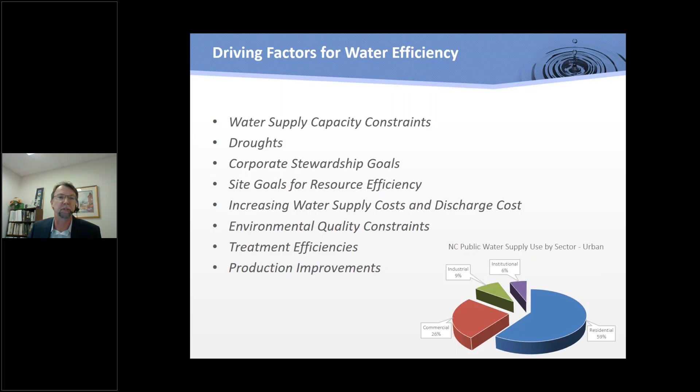One more slide here as background before we get to our speaker. These concepts really will lay the foundation for any successful water efficiency program, and we're going to hear our speakers talk to these in a little bit more detail. First, you have to understand your water and sewer accounting.

Water rates, like electric rates, are complicated. There's fixed rates, inclining, declining blocks. You might have capital fees associated with your meter size, which may be oversized in your case. You might be paying thousands of dollars a month more. And so we have to understand that accounting.

We have to understand our baseline. What is our use? Do we need a sub-meter to understand our uses better within our facility? Can we use benchmarks to compare water use intensity, gallons per unit produced, gallons per gross sales? Look at that internally. It's sometimes challenging to do that in manufacturing, but the external benchmarks can really drive choices in the future for new technologies.

Each site should really craft its own water balance. You should have a pie chart and know where all your water uses are through your cooling towers, through production, through cleaning, through kitchens, through domestic uses. You can do that theoretically, or with sub-metering, but that's a starting point for your green team or your project team to work on your projects.

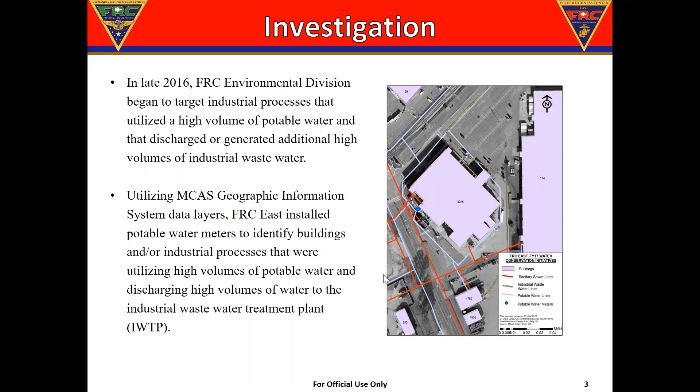We discovered in doing this that we have a large facility, our naval engine airfoil facility. It's about 420,000 square feet, and it has 27 industrial activities to include stripping, deplating, washing, cleaning. And we found out that we were using nearly 79,000 gallons of water per day, and that's potable water.

What we did is we partnered with the Marine Corps. We installed some water meters, and we tried to figure out what was the largest source, where the water was coming from.

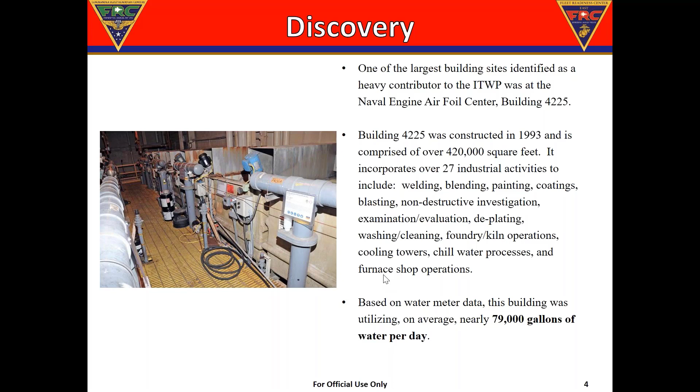When we identified the activities, we worked with the artisans in those areas to figure out what are some of your normal practices? How do you go about your day? What are you using water for?

What we identified was a lot of the water was consistently running in some of our air scrubbing systems, rinse tanks, and then we have the clean line where when we strip aircraft parts, it goes through and gets that second stage, third stage, fourth stage of cleaning prior to being repurposed and put back on aircraft. So this was our largest area of water use in this facility.

So what we did is we partnered with the Marine Corps, we partnered with the Navy, partnered with our Department of Defense, and we updated our clean line into an automated process. It has automated actuated valves, solenoids, and different pumping systems.

Another thing we did is our air scrubbing system in the facility, we made it a closed loop system. So now when the water is running through the system, it's not just going down the drain to the industrial wastewater treatment plant. It's actually a closed loop system, and it's constantly monitored. It reutilizes the water to a point, and then at the point where it can no longer be effective for where it needs to be, that is when we discharge.

And then we went from a continuous overflow rinse process, where the tanks were consistently using water, to an artisan-initiated hose flushing. So we installed these hose systems in this facility to allow the artisans to control the amount of water that they were using when rinsing the parts and the products.

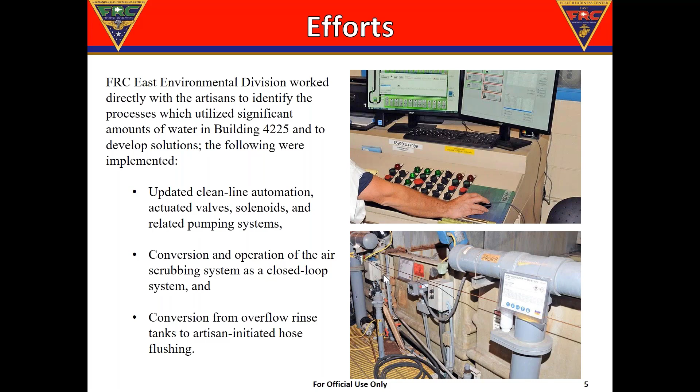At the conclusion of this, a year later, we identified a 56% reduction. We moved from 79,000 gallons of water per day to 34,600 gallons of water a day. And at this point, we're sitting at a 62% decrease in the amount of chemicals required for the treatment at the IWTP. In 2017, FRC East was given a credit back of $540,000 in savings.

To date, we've actually reduced our overall water usage at the plant through these constant monitoring efforts, and we're sitting at a 61% reduction of overall potable water use in our industrial process. It's a continuous effort, and we're continually reducing this. We're trying to get to a point where we're using the least amount of potable water possible.

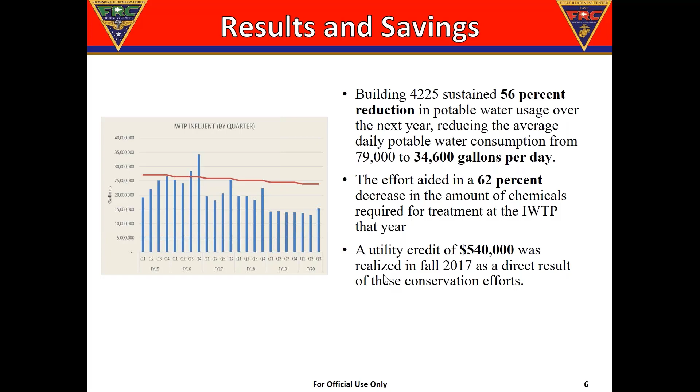We are a large industrial facility. We have a lot of activities. We're very involved with Eastern North Carolina and the state of North Carolina. We've been here for more than 70 years. We've been a steward level member with ESI since 2004, and we are constantly looking at ways to improve our process.

At the Department of Defense facility, it's a challenge every day. Some of our facilities are rather old, but with constant monitoring and upgrade, we're moving forward.

At this time, I have nothing further. I appreciate the opportunity.

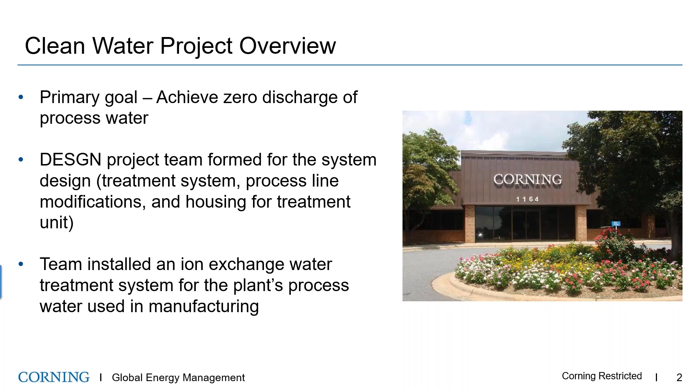The system provided several benefits to both the business and the environment. As I mentioned earlier, the installed system was projected to provide 11% water reduction. But what we realized after the system was installed is that we actually had a net reduction of greater than 20%. So we far exceeded the original theoretical value that we had calculated for the water reduction. That was always good, when you can exceed expectations.

Additionally, the system returned 650 hours back to manufacturing. This was achieved by installing a feed and bleed feature on each process line that essentially allows the water to be turned over every 12 hours. We operate on 12-hour shifts, so in theory that water is refreshed, or returned back to the filtration system, once every 12 hours without any impact to manufacturing. Manufacturing never sees that process going on, it's all automated, so it's all going on behind the scenes and does not impact the manufacturing at all.

Prior to this system being installed, manufacturing would have to shut down once per week and just do a drain and cleaning of the process systems.

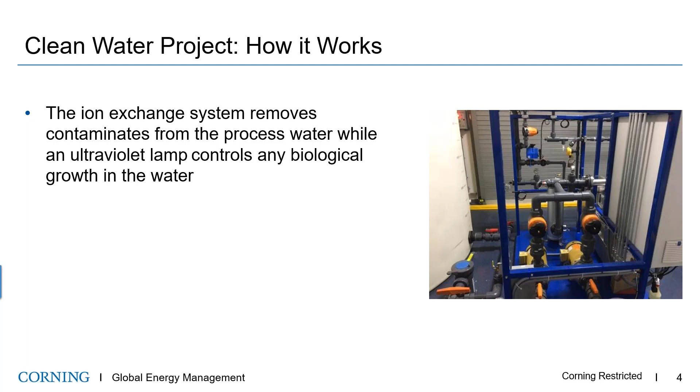And as I mentioned earlier, the system is closed loop, so the only loss of water occurs through evaporation and drag out at the manufacturing process lines. There's really no limit to the number of times the water is filtered and reused in manufacturing. It's a continuous cycle, so water is continuously draining back to the treatment system, filtered, treated, and then returned back to manufacturing on a continuous basis.

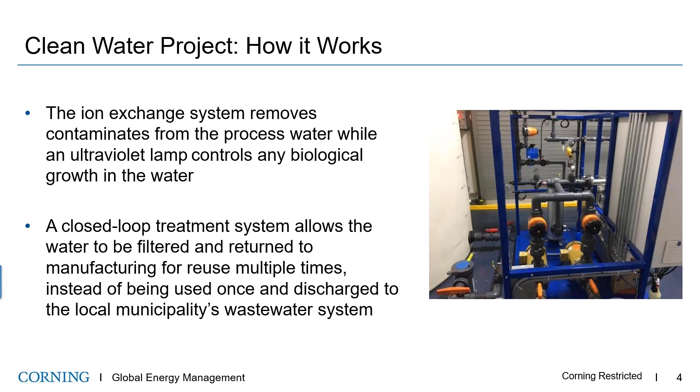So, of course, with any project, there were a few challenges we had to overcome. One was locating a place for the treatment system. In the very beginning, when the project was being discussed and reviewed, and all the analysis was coming together on the cost, one of the first requirements our leadership placed on the team was that we could not have any manufacturing space for this system. So you got to figure out how to do all this, but you can't have any manufacturing space. And we all know manufacturing space is a premium, so it was very understandable.

So the team had to get creative. Fortunately, we had a small utility building, if you will. It was a brick building that once housed an emergency diesel generator, which was removed many years ago, and the building was just being used for storage. So what we did is we basically enclosed that building, insulated it, and that became our water treatment building.

The challenge we had with that building was that it's very limited in space, and so we only had enough room for one storage tank, a 4,000-gallon storage tank, for the processed water. So we had to come up with a way of managing the dirty water coming back from manufacturing, and also the excess or surplus of treated water that manufacturing may not need.

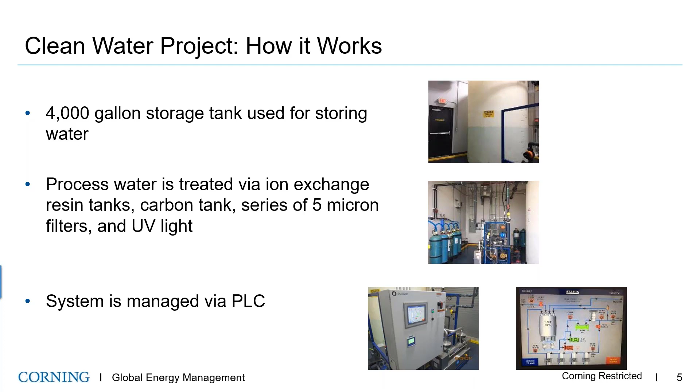In the design phase, we wanted to ensure we looked at energy efficiency. So what we implemented was that all electrical pumps had a variable frequency drive so that we could minimize energy usage.

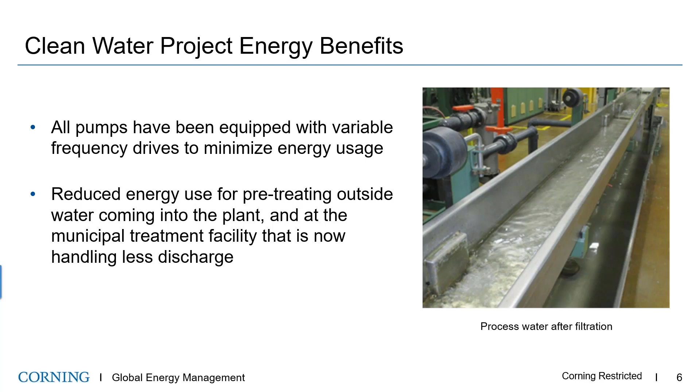That filtration system has also allowed us to eliminate any need to perform pre-treatment of incoming city water to meet the process parameters. That was another advantage of the system.

The project was very successful, such that Corning has installed the next generation at two other manufacturing facilities, and they continue to look at expanding at other locations around the globe.

In summary, the project helps the site reduce its impact on the environment through conserving natural resources, reduced operating costs, and increased manufacturing capacity.

And sort of icing on the cake, something we're proud of as well is that the project was selected as top project of the year by the Energy Star Partners. So another great external recognition that the team and the project received.

So overall, a very successful project for the site and for Corning. And that's all that I have for my presentation.

Well Steve, thank you so much. That was a great overview of this reuse project and how you did it and those constraints. So thank you for sharing that level of detail. Super informative, and I know we're going to have a lot of questions here at the end.

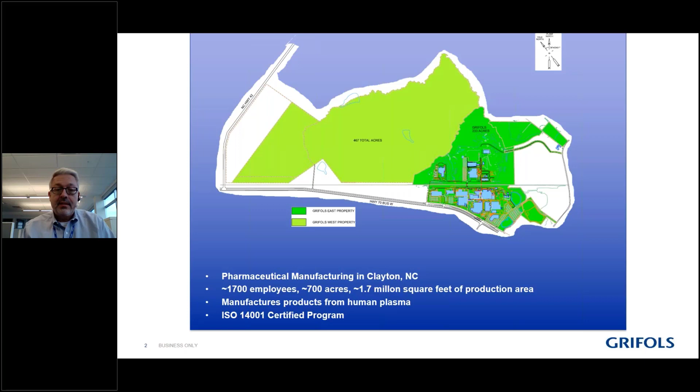Grifols is a pharmaceutical operation located in Clayton, North Carolina. We have about 1,700 employees, approximately 700 acres of space, 1.7 million square feet under roof. What we do is we take human plasma and manufacture it to make a product. The site only occupies a small portion of that 700 acres currently, approximately 200 of those acres, but we have a footprint necessary to expand as we see the opportunity presenting itself.

The site is of course in Clayton, but our corporate headquarters is in Barcelona. So there's a certain Spanish tint to our activities here and what we pursue. The company has been able to link its history back to the Spanish Civil War and the need for plasma on a battlefield situation. Of course, that moved up into World War II, and since that time, moving to the present, we've been able to take plasma and find a multitude of uses for it around the world.

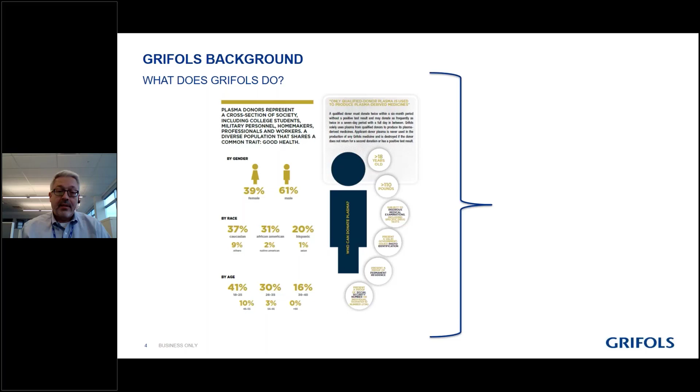What we do is we collect plasma from the general population. Our collection locations are situated outside college campuses. They're located near military bases. And what we do is take plasma from an individual who's healthy and then turn it into a final product. You may be aware that currently we're also able to take plasma from individuals who survived COVID-19.

The antibodies that they have in their plasma can be concentrated and used for those individuals who are struggling with that virus right now. We have an operation here in Clayton doing that currently. Not a lot comes out of us because it takes a number of donors to come up with a useful product, but we are doing that right now.

So that's the background of what Grifols is and what we do. Now the presentation is about the importance of including the one-time water use and sewer use fees when justifying a project. We use a lot of water at this location, especially water for injection. To get there, we take city water, run it through a reverse osmosis system, then distill it to get water for injection for necessary use.

Our RO systems are old, and while effective, they have a tremendous amount of disposed water after processing. In fact, as high as 40% of the water going through many RO units is disposed of. We found a system that, instead of bisulfite injection, uses carbon filtration to properly process the water through this RO system. By doing that in just one of our four RO skids, we could save as much as 9% of the entire city water use from just this one change.

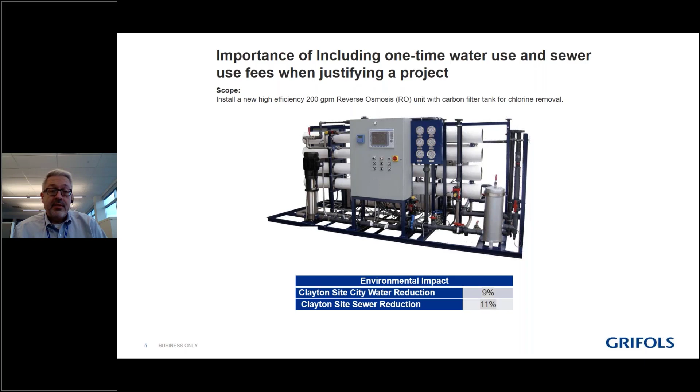And we would decrease the amount of water sent off-site by 11%. It seemed like a no-brainer given the tremendous savings from this new system, a 200 gallon per minute operation. The existing one was 22 years old. Everything was operational, but we needed to replace the system, the controls, the instrumentation, because of its poor reliability, and replace it with this new one.

I mentioned the savings in water use and water purchased. The operational savings would reduce the amount of city water we'd need, as well as sewer. Instead of having 40% of water for disposal, we would find ourselves between 5 to 10%. Maintenance would be better, membrane replacement would go away, and we'd even reduce the number of maintenance employees necessary to maintain it.

The cost was about $1.2 million, and it looked like this was fine, that this ought to go forward with no issue whatsoever. The return on investment, a simple calculation, was 3.6 years.

But unfortunately, we got a hold on this. Management told us, no, of all the projects we currently have in place, water is relatively cheap, don't go forward with this one. From an environmental standpoint this was somewhat of a shock, because it has such a tremendous benefit to the site. So we had to go back and look at other ways to justify this project.

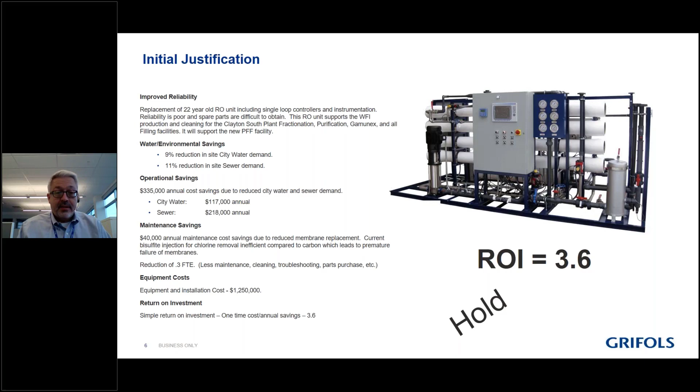That justification had to deal with the municipal user fees. Here in Clayton, if you want to request additional sewer usage, it's a $16 per gallon increase. If you want additional water, it's a $9 per gallon increase as well. These are one-time fees that add up to about $25 per every additional gallon you need.

Now, this site is expanding. This RO system would help us more efficiently use the water we're already purchasing. If we didn't replace it, we'd find ourselves needing that increase in water use, as well as an increase in sewer use. Many people don't realize these two fees will be needed in the future if they just want to continue operating as they do and ask the city for more water and the wastewater treatment plant to handle what they send, and these fees are usually just not included.

I know most engineering departments have an SOP that says a certain percent is acceptable or not acceptable. But when the rubber hits the road in some capital expenditure discussion, that cutoff number seems to move from one side to the other.

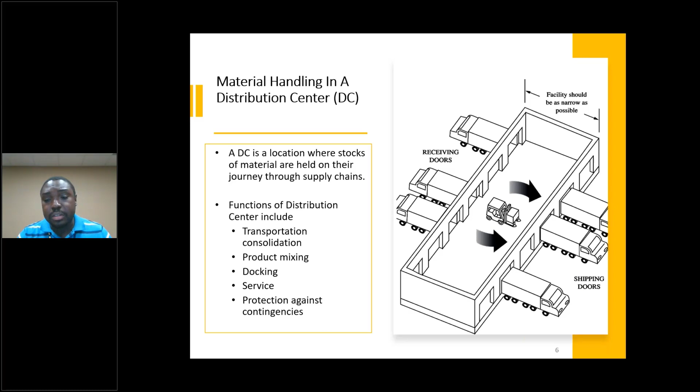Now, if you go through the entire process, the primary activities at a DC include receiving the materials, then doing a put-away where you take the materials and put them in storage locations or picking locations, and sometimes move them from storage locations to picking locations. When we talk about picking locations, this is where people or machines pick the material needed and process them in the quantity required to do the shipping.

We have different types of picking. You can have a situation where you're doing a pick-to-belt, which includes having a conveyor system and picking case-full loads of materials, setting them on these systems, and they go down to a sortation process to where they're supposed to go before processing and shipping.

And you can have a situation where, in our case, we use a lot of cluster picking, which involves picking different materials and creating a mixed carton for our customers. Then finally you have shipping, which is just making sure the product gets out on time to our customers with the right quality and integrity.

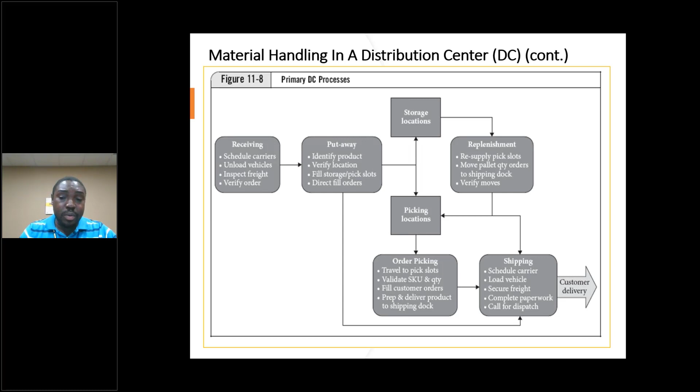So in talking about what happens in general in the DC, material handling becomes one of the critical components of it. It is important that we are able to move materials within short distances, but then move them effectively, because that affects our productivity rate as well.

Some of the things that you would need material handling for would be just moving bulk materials into storage and from storage, moving materials from storage to pick locations, unloading and loading vehicles, and cross-docking, which would be just taking it off one tractor trailer and putting on another for onward movement to a customer. The aim is, of course, to move the material as quickly and as safely as possible within your DC in a very short distance and do so effectively. And it is this effectiveness that opportunity charging comes in, and we'll talk about that in a minute.

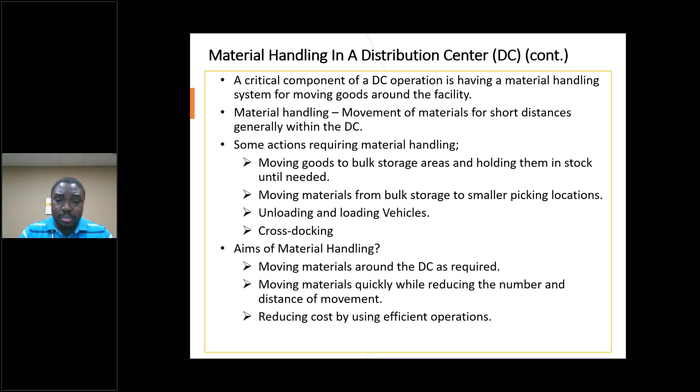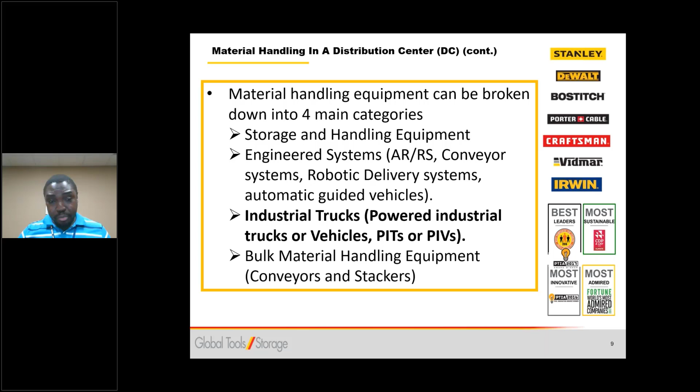With the different types of equipment that you have for material handling, we are going to focus on just the industrial trucks, the powered industrial trucks or vehicles. But we have different types of material handling equipment, and you can break them up into four main categories, including the automated storage and retrieval systems, which is more of the robotics and all. The bulk material handling will be a lot of conveyor systems, and we use conveyors here a lot through the facility. And then you have storage and handling equipment as well.

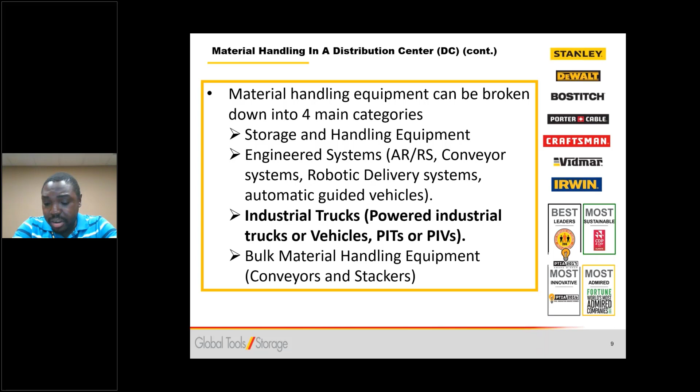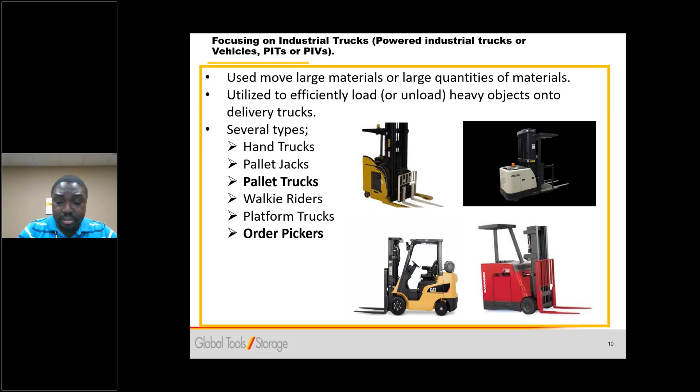So our focus, though, for this presentation is really on the industrial trucks. Some people refer to it as powered industrial vehicles, and some refer to it as powered industrial trucks. These are the forklifts, the pallet jacks, the walkie riders, the order pickers, and what have you. These remain integral in a lot of DCs, especially for DCs like ours, which does not have a lot of automation. Our conversation would be based on the pallet trucks and the order pickers, which are electric vehicles that we use in the facility.

Now, the opportunity with using the electric forklifts is the fact that if you have an indoor warehouse, of course, you want to minimize your emissions from any type of vehicles or any type of process that you use to ensure good indoor air quality. And so that's why electric forklifts are the preferred forklifts to use in an indoor environment.

Furthermore, they run more quietly than the internal combustion forklifts, which means that if you have processes that do not give off a lot of sound, then you do not have to worry about the hearing conservation program and adhering to that. Now, these electric forklifts are powered by large lead acid batteries. Some of them come way up to 5,000 pounds and more, and these must be charged routinely. And that would require you to make sure that you have a designated area for charging and for changing your batteries if that becomes necessary.

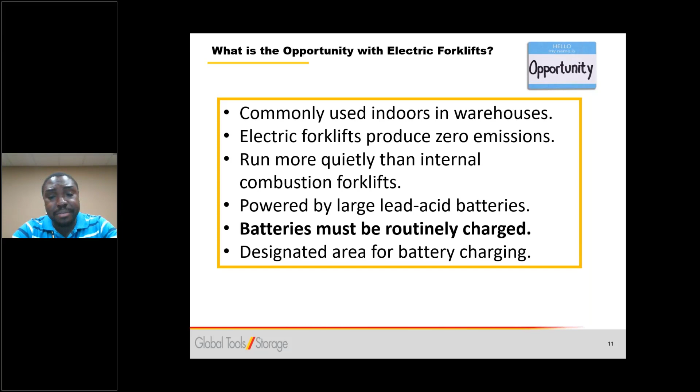So, what is the problem? What's the situation that we are dealing with? Now, conventionally, you have a situation where electric PIVs are usually operated for one shift and then charged overnight. And then you have a situation where after charging, you have to also let them sit for about 8 hours to cool before you use them.

And so the conventional charging becomes ideal for when you have a single shift operation. And the way that works would be for you to buy extra batteries so that every forklift would have an additional battery or two, so that whilst one is cooling, the other is in there operating.

And what happens is you have a situation where employees are changing batteries between shifts and all that, and you have different possibilities of forklift batteries that weigh 5,000 pounds falling down based on the number of times you are changing them, possibilities for environmental spills, possibilities for high repair costs because now you have a lot more batteries, you are paying a lot more to maintain them. And sometimes if you want to have the best in the system or in the business, you need to have very good battery changing equipment installed, and that can also be expensive.

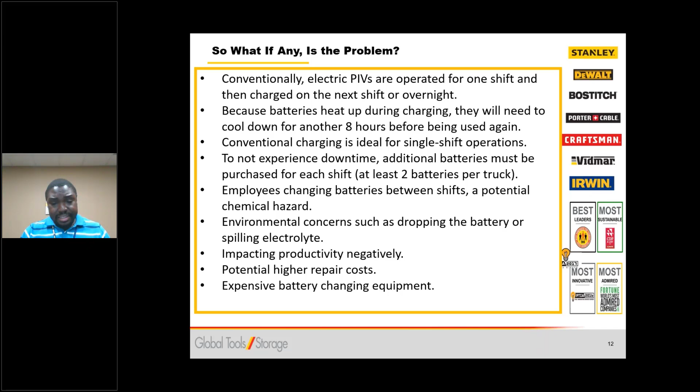So how does opportunity charging come in here? Opportunity charging is just as it sounds. There is no one best fit solution for all warehouses and for all businesses when it comes to how you are using your material handling equipment.

Now, we have a situation where if you are running multiple shifts, like we do with this particular DC - four different shifts, first, second, and third shift, and the weekend shift as well, operating almost 24/7 - we do not have the luxury of waiting 8 hours to charge a battery and then buying multiple batteries to be able to run the over 100 PIVs that we have, and be able to do well when it comes to productivity and when it comes to our desire to be great environmental stewards and to ensure safety as well.

So we opted to go with opportunity charging, which involves being able to charge your battery throughout the shift at any time you get. So if you have associates going out on break for 10-15 minutes, these opportunity chargers allow them to put their forklifts down, plug it in, go to break, come back, and then start using them. When that happens, you get a longer use out of the battery for the period and don't have to wait till the end of the shift, run the battery down completely to 0%, and then charge it all the way back up to 100%.

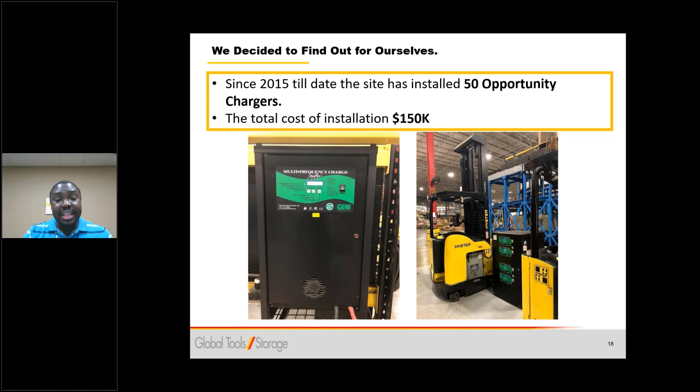So since 2015 to date, we have installed about 50 opportunity chargers at a total cost of $150,000. This has been installed throughout different parts of the DC so that based on where you find yourself, which department, you're able to use the opportunity charger available for you at your department.

So what has been the benefit we've seen? Since 2015 till date, we've actually increased the value of products coming in by about $5 billion. We've increased our pallet locations, increased the number of products coming in, and increased the number of products we're shipping out. So this is just to say that we are doing more. The good thing is now we're doing more with less, because the number of electric PIVs have reduced from 114 to 84 today.

Based on increased productivity and the opportunity charging that we have put in place, we've been able to eliminate some of the PIVs in our system. The lower number of PIVs we have, the better it is for safety and for maintenance cost. And if we can reduce our PIVs while still increasing our productivity, increasing shipping and output from the DC, which is what we are measured on, then it's a win-win situation on both the EHS side and the operation side.

Based on that, we had a lot of lead acid batteries in our system to sustain the number of PIVs running multiple shifts, which would require us to switch out batteries. Now that we aren't, we've been able to cut down our lead acid batteries from 265 to 149, a 44% decrease. We're still looking to cut more down, because sincerely we can - we don't need an extra one for every single PIV. So we are still looking forward to cutting more of those batteries down. But in the past 5 years, this is what opportunity charging has done for us.

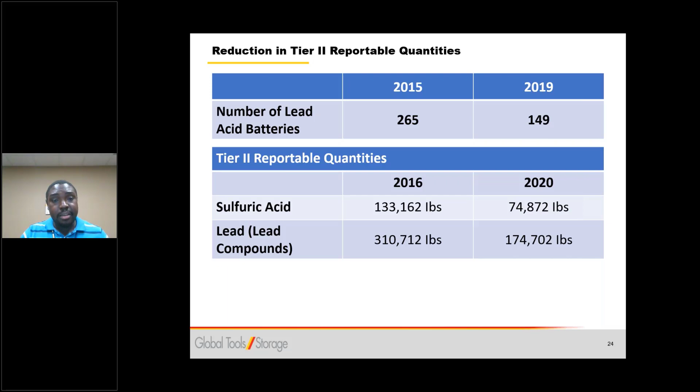And what we have done is being able to reduce the lead acid batteries from 265 to 149 has allowed us to store less reportable quantities on the site, which means we have to report less to the state, which means that if ever there were any emergencies involving these lead acid batteries, we would have less hazardous chemicals to deal with. So that's also a good thing from the project we've implemented.

And so there you have it. What we have seen is lower electricity consumption, less spills reported in the past 5 years, lower cost of maintenance and servicing of batteries and forklifts, and increased productivity and efficiency based on that, and our ability to invest in other continuous improvement projects.

So all the money that has been saved has been put into other projects that we've done, including being able to go to zero waste to landfill. We've been able to do that because now we've been able to save from our processes and reinvest in other areas that benefit the environment as well.

So I think for our site, we've seen a benefit from installing opportunity chargers. There are a lot of believers at this site in opportunity chargers, and based on that, we recommend that to any other site that has the type of complexity we have, having to operate for a long period of time in a facility this size and using the number of PIVs we use, 85 and over, would be something worth considering.